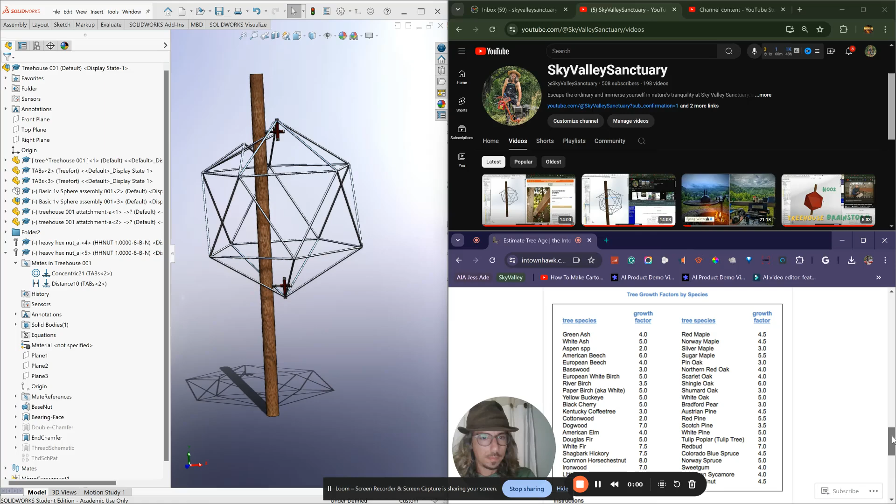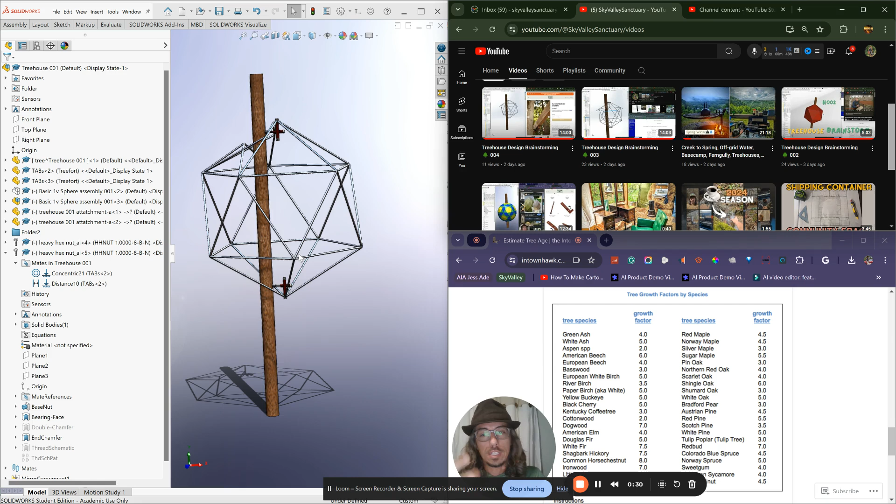So, we are on video 5. So, I feel like this has been really interesting, this process. Starting with video 1, just kind of getting into the idea of these geodesic shapes in trees, looking at geodesic spheres and zomes, and then honing in on the very basic geodesic sphere of the equilateral triangles, and starting with nothing really, and then getting the model of the sphere, the model of the actual tree attachment bolt hardware, and actually seeing that in the tree, and then continuing to roll through this.

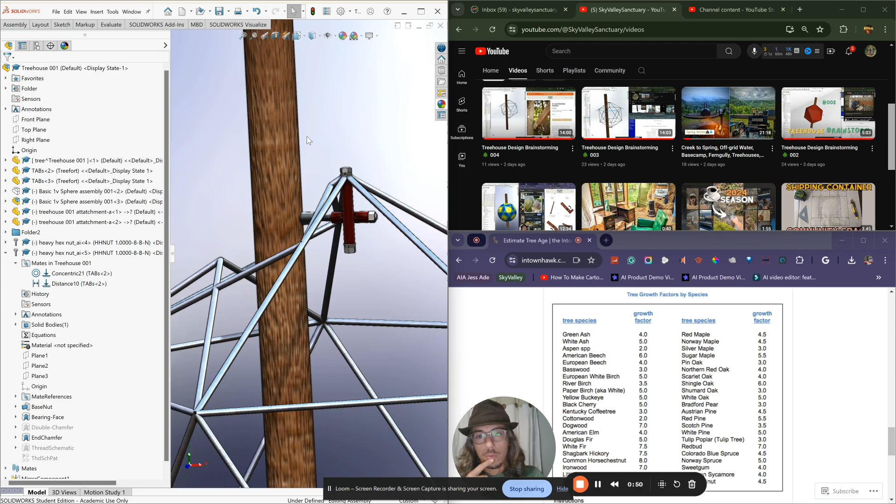And I feel like this is helping me feel like I'm out there putting it in the tree and building and seeing where I'll run into issues and things I need to consider. And then it's also giving me the ability to kind of brainstorm and open up in kind of different tangents and different directions. So each of these last 4 videos have kind of done that. They've helped me see this a little bit clearer.

And I feel like at this point in video 5, with this basic design, I'm pretty happy with the general idea and I think I don't need to really beat this into the ground any further. I think it's sound enough, and then I can really hash out all those little details when I'm really, really ready. But this, I feel like the general gist, I really enjoy this. So

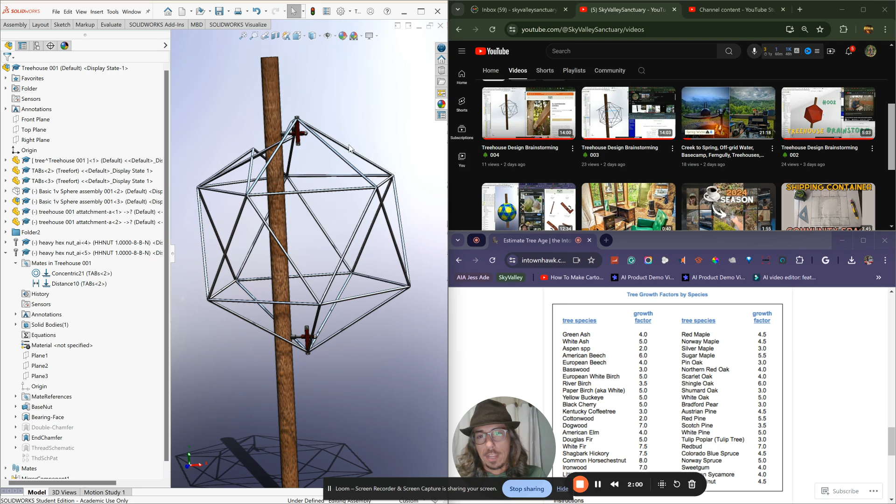I ended up removing the eaves just to get the kind of look, because I think the eaves kind of make it turn into like a little gazebo or whatnot. And there's something about seeing this complete shape without it being chopped up. So I'll have to think about other kind of more aesthetic stuff with this and how I want to approach it.

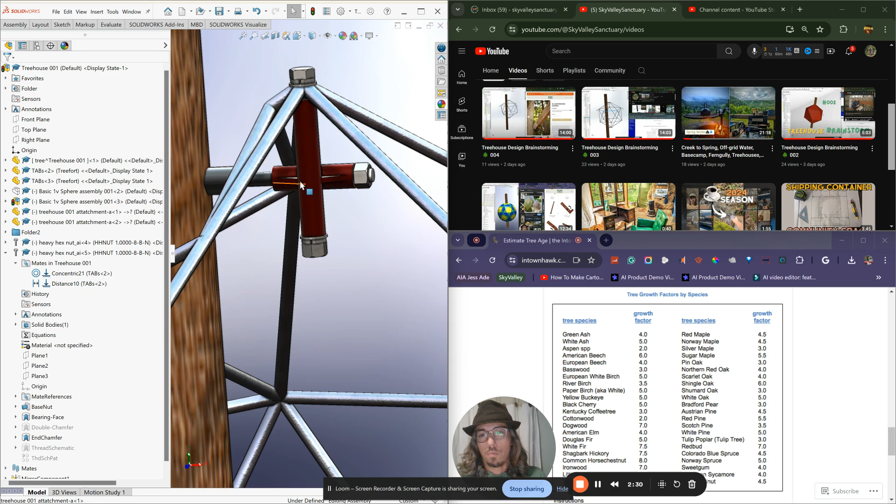I ended up playing with this attachment on the inside. I was just laying down last night thinking about this, how to make this as simple as possible. And structurally, I don't know if this is going to be sound enough. I'll have to look. But I just wanted to model something to get the idea across of what I'm thinking. And it just kind of hit me while I was laying in bed that there's a bolt that's going to go through all these pieces of conduit that are going to be smashed in the top. There's going to be a bolt. So it's like, man, if I could just stick that bolt right through something, it would be easy.

And when I did that, the conduit ended up running into the tab here in the hardware, and it didn't leave room on the end to be able to attach a strut or a cable. This was kind of sticking out past the conduit, past the roof line. So I had to raise it up to get clearance to be able to work with the end of the tab to attach the strut piece and all that. So that's kind of how it ended up like that.

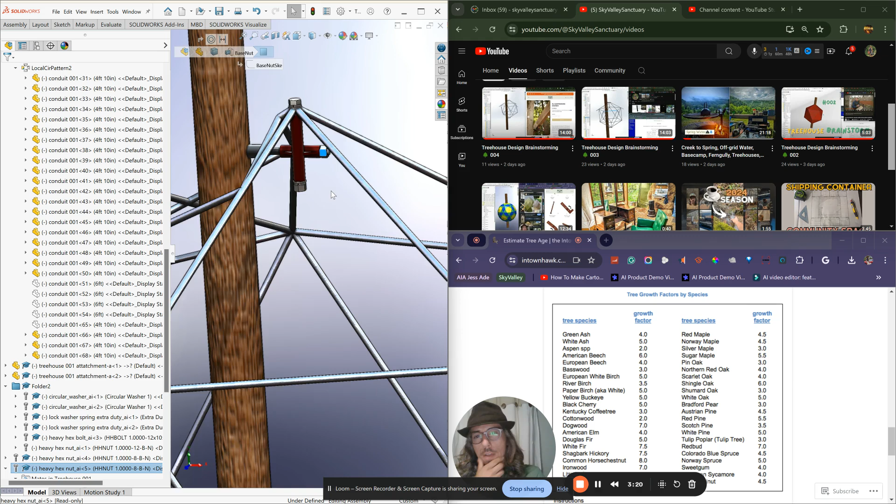So it started out with the idea of just being able to use the bolt that's already going to be there, and then having to raise it a little bit. But essentially it would be a little bit beefier bolt, and it would go all the way through and then have a nut on the bottom. So that's the gist of this. And I kind of like it. It keeps all the hardware internally inside the structure, so it's out of the weather and whatnot. It seems like this should do the trick.

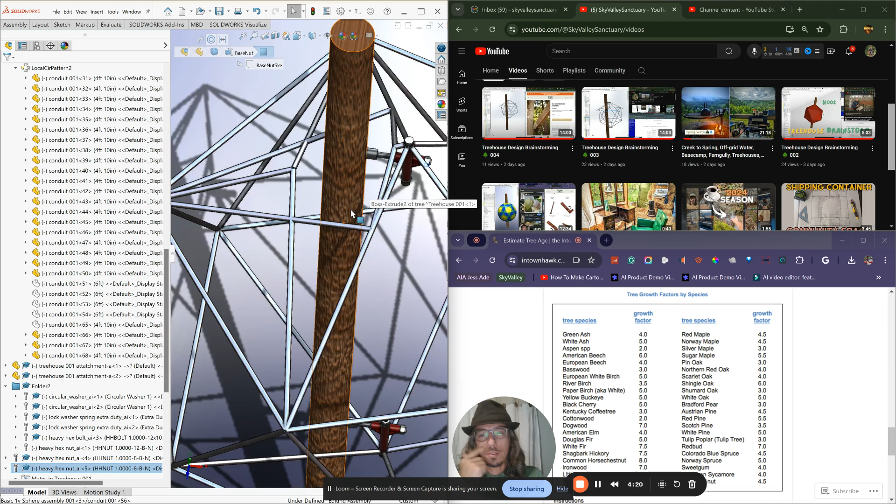And then here we'll have a cable, and then on the top we'll have a strut. And I think that'll be plenty strong enough for this. And some other ideas I'm considering. I was thinking about how this roof is going to cut in around the tree, and I have a couple ideas. I'll have to see how that's going to go.

But if this is going to be not just for camping and whatnot, if it's going to be an enclosed structure, I'll probably have to create a wall or contained area around the tree from top to bottom, so the water can just go straight through and the tree isn't inside the structure. So there'll be like a column or cylinder around the tree that lets all the water just pass through. That way the structure can be watertight.

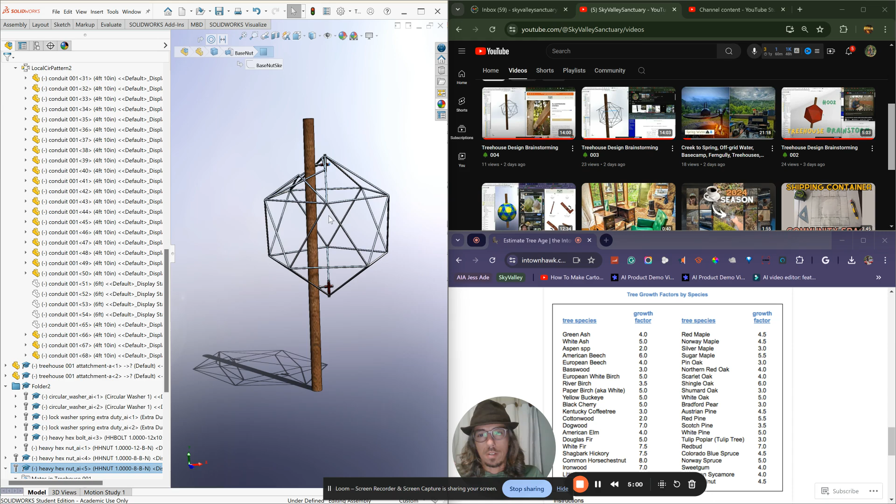That's the only major thing. For the floor, I was considering each of these points is going to have a bolt, right? So there'll be a bolt sticking through this into the structure, a bolt from here facing in the structure, a bolt here facing in towards the tree. All these points will have bolts facing in towards the tree.

So those are places I can bolt the steel tube onto, or some kind of wooden beam if I want to go that route. So I can use these to build off of and build a solid floor of some sort. And then again, it's just going to depend on the use and how sturdy and complex it needs to be, whether it's just a platform as an outlook, or it's just for camping, or it's literally just a structure to pass from one tree house to another, and it could just be like a net

floor and net walls. So I think this offers a lot of versatility because of the geodesic shape being very rigid and strong. We can build off of it. So once we can get it in the tree and we have this shape, we can really have some fun with it. I think that was the main goal, to be able to get these rigid geometric shapes up in the trees and then be able to work with them from there. I think this opens up a lot of potential.

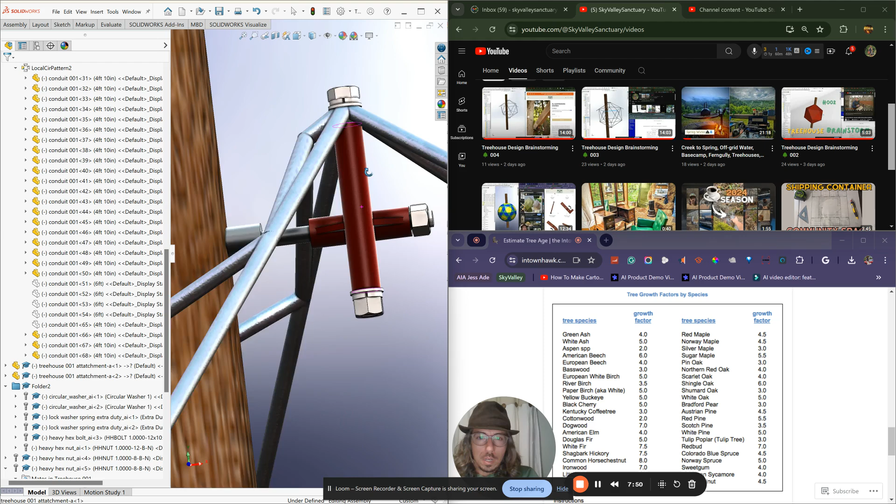And it's really efficient because all the struts, you can get 2 struts out of every 10-foot metal conduit. So then this becomes pretty efficient to build. I'm hoping I can come up with something even simpler than this, and I'm not going to have to do any kind of custom machining and welding and stuff, but if I have to, I have to. Well, I'll probably, with this lightweight, simpler one, be able to come up with something that's kind of off the shelf with a little bit of drilling and stuff, I feel like. But we'll see.

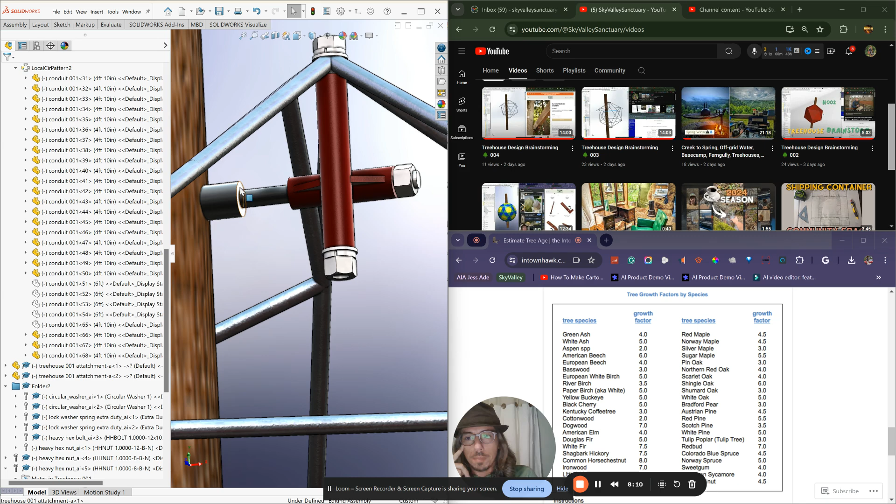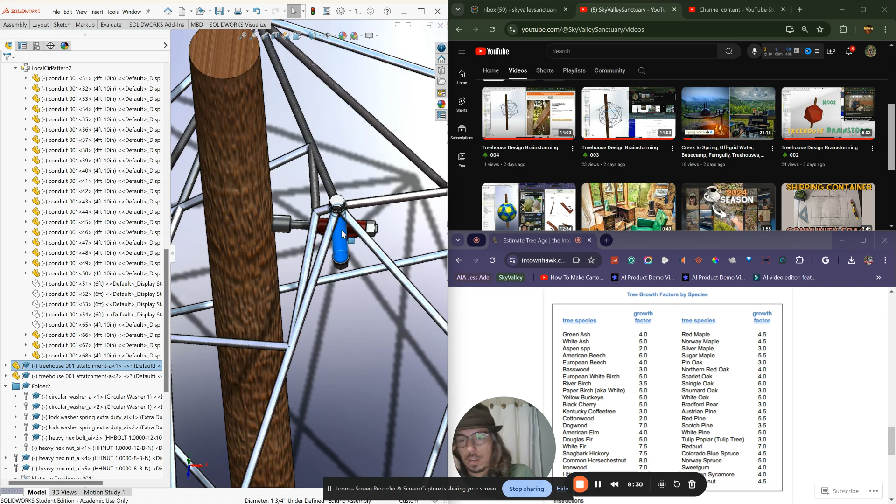I'll probably need some kind of spacer pipe to hold this in place, however far I want to have it off the tree. You can adjust the distance to the tree. I figure the further out, the more growth the tree can have, and I'm gonna have the strut anyway. And I can't remember the exact weight that this can hold. Do I have that? I have this book, the Treehouse instructional guide, and it does have the capacities in here. Let me see if I can find them real quick.

This book is amazing, by the way. It kind of just puts everything together. You don't have to go hunting to try and find all the basic things about building a treehouse and all the hardware and stuff. It's just a good go-to spot. I feel like you could find probably most of this online and on their website, but this is super handy. All right, so we're looking at Treefort tab.

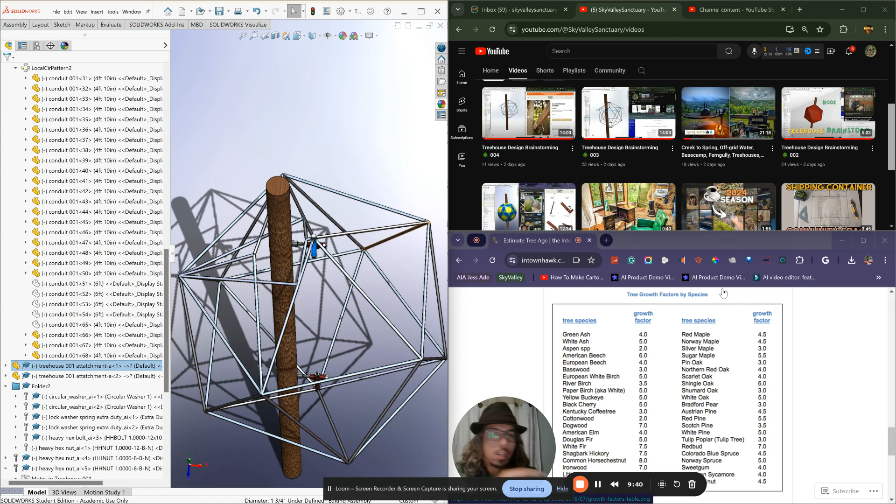This isn't super precise, but okay, it says maybe 2,000 to 4,000 pounds with the cable. You're looking at 3,000 to 8,000 pounds. The cable and strut, 6,000 to 16,000, or something along those lines. This chart isn't super precise. There's more precise data on their website. I think if you go to the Treefort tab hardware on their site, it has a more specific range and chart. But so that's that.

The growth rate. So I went back and forth with the size gap that I wanted to leave here, and then it got me thinking about the growth rate of the trees, and that's just another thing you gotta consider. His rule of thumb was something like you trim the deck around 2 inches from the tree. You don't build a wall of the actual structure closer than 12 inches from the tree. So I had those in mind, but then I started digging in.

A lot of the trees that I have that are smaller, that are really perfectly straight trees, are, I think, yellow tulip poplar trees. And when you're looking at how much they grow per year, there's this thing called the tree growth rate factor, and this is a way to figure out their age, and by having this growth rate, you can get a sense of how fast it's going to grow each year. So the tulip poplar tree is a growth factor of 3. So every 3 years, it's going to grow an inch roughly. This made me realize that this particular tree grows pretty fast in its width.

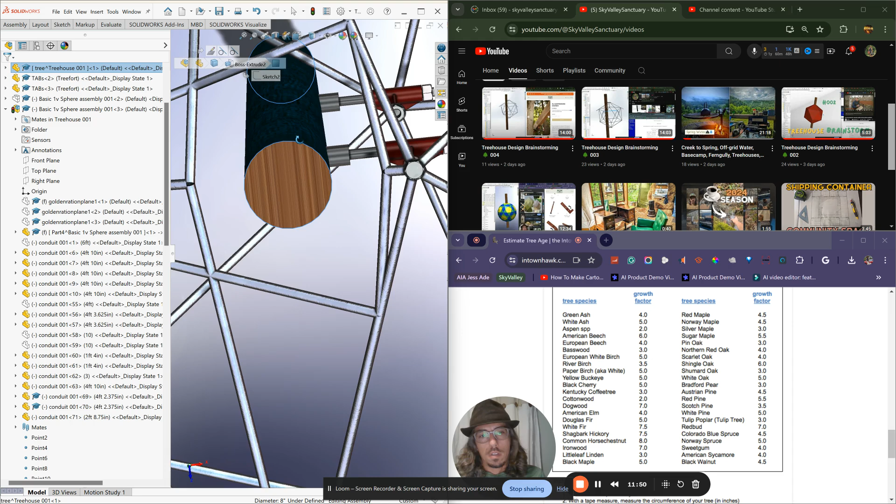But here's the instructions and formula. If you are curious about the age of a tree, you can take a measurement of the circumference around it, right about your chest height, and then kind of calculate with that growth factor, figure out your age.

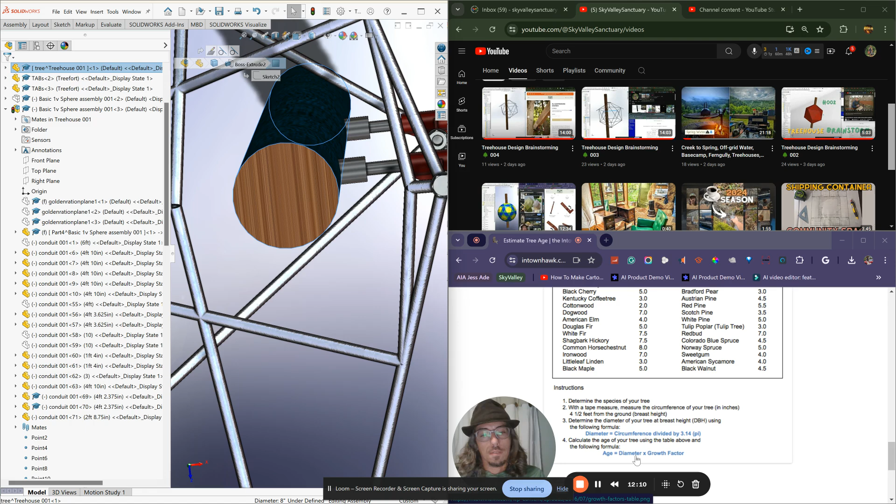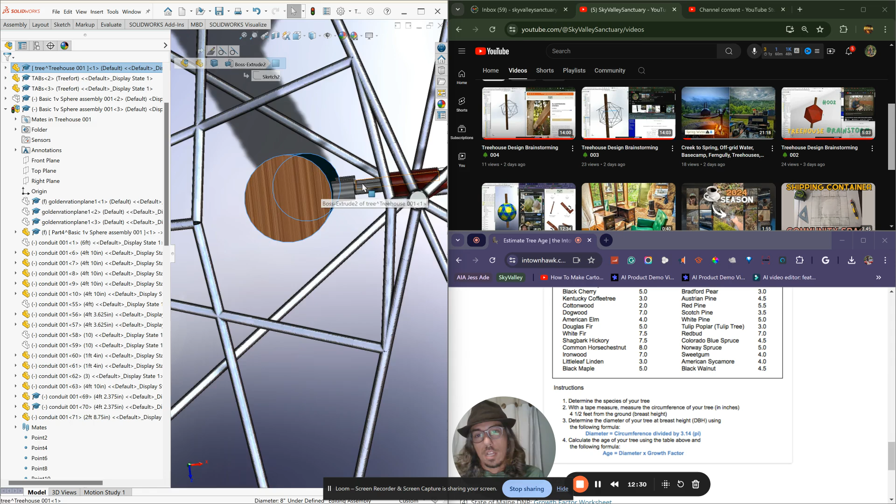But so with this growing an inch every 3 years, I think I was looking at it and I've got roughly, if I'm using like the smallest 8-inch tree, like 15 years before I'm going to have to start kind of looking at things. That's 15 years for the edge of the tree to reach the here, I think is what I calculated.

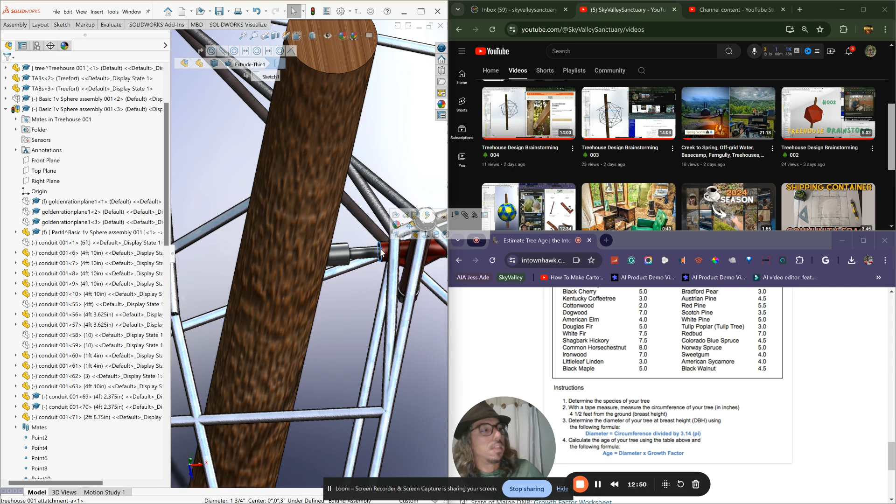But yeah, this is another thing that now I need to think about a lot more carefully. I think with this little kind of Treefort, smaller, lightweight, kind of easily disassembled and assembled tree house thing, it's not as big a deal.

But I think with my goals of building some of these a lot bigger structures, I would like to build them so that I don't have to touch them for 100 years. I'd like them to be able to last in that tree and not have to think about rearranging structural components of the tree house in these bigger ones. So I just feel like that's something you got to consider and that we'll have to keep in mind moving forward.

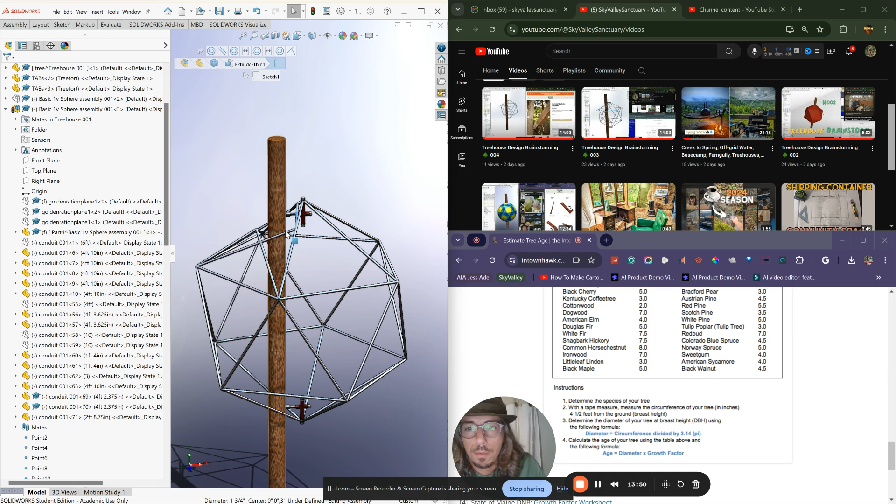And I might hash out a little bit further on this to try and get as much space as I can for the growth. But I think 15 years for kind of a playhouse with like netting or just a place to connect bridges between different tree houses is probably fine. And I don't think it's anything extreme to get this modified. It would just be cutting the roof back a little bit and doing a little patching and things. So it wouldn't be a huge deal.

But yeah, this has been fun. I feel like this is exactly what I was hoping to be able to kind of hash out, getting these geometric shapes in the trees and running into issues and ideas and concepts along the way and finding some really neat tangents to run on and think about, like the Charlie's webs, those tree nets, and some of the other things that I was able to share in these previous brainstorming videos. And yeah. So I feel like I'm happy with this one. I'm going to probably let this be.

It's already been midnight and I got to hit the road early and I'm heading back to the mountains. So I won't be on my computer playing with these as much. I'm going to be really, really focusing on building and getting stuff done on the property for a while, I feel like. But I just had this perfect moment to get on the computer and play in here.

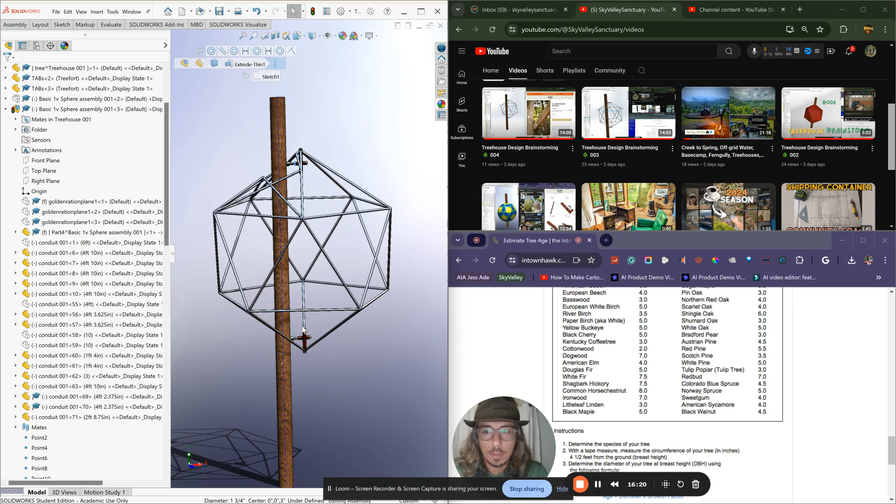But yeah, so I will be back at the property tomorrow, and I'll be sharing a lot more videos of me actually working the property. Hopefully I will have a chance to have a break and go hiking and find the little tree that I want to build this little guy in, and I can throw something up in the trees. I'm getting very anxious to build something in the trees, but I just have so much work to do on the property. There's just so many little things to get done.

With only being about 2.5 to 3 months in this season, it's been nonstop trying to expand and fine tune the Airbnbs and the glamping and get the Airstream fixed up and get that available for guests. And yeah, we're just dealing with nature and life. But I'm looking forward to getting back there and continuing to build this dream and see all this start to come to life.